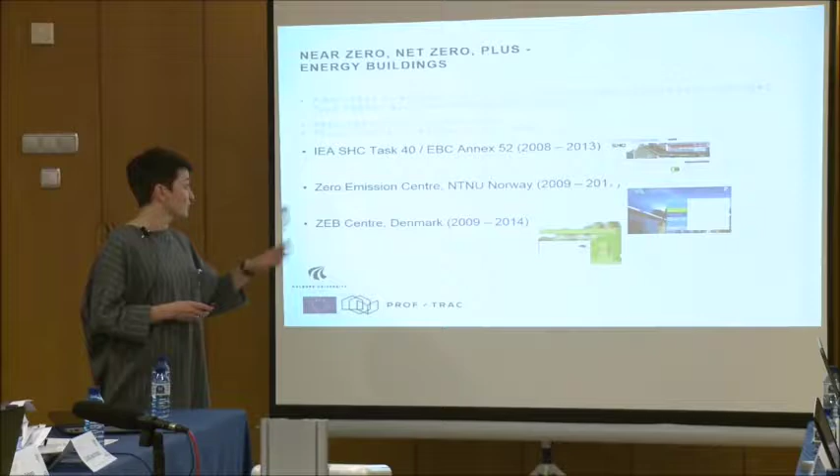Is this a building that produces energy, or a building that doesn't use any energy? Is it a building producing energy on-site, or can we produce it by a windmill placed somewhere far away in the fields? Many of those questions were asked within this Annex 52, and one of the outcomes of this work was to make a definition of nearly zero energy buildings.

As a result of this work, we started a collaboration within the Zero Emission Center in Norway. This center started in 2009 and is still existing. It will finish now in 2017. A corresponding center for zero energy buildings in Denmark started in 2009, and it's now closed, since 2014.

The difference between those two is that in the first one, the focus was set more on the zero emission center, so we speak of the emissions of the building. And in the other one, we have been focused more on the energy.

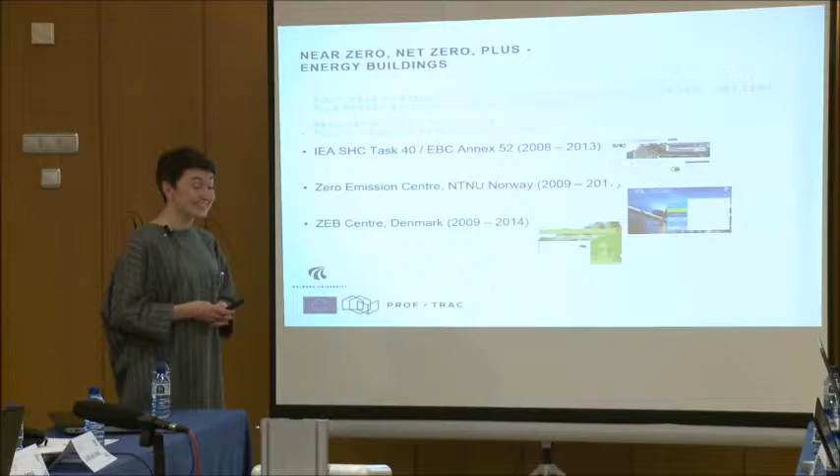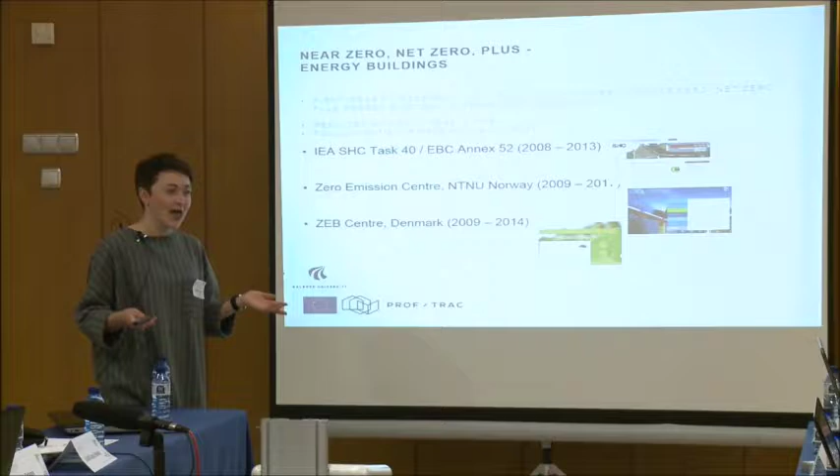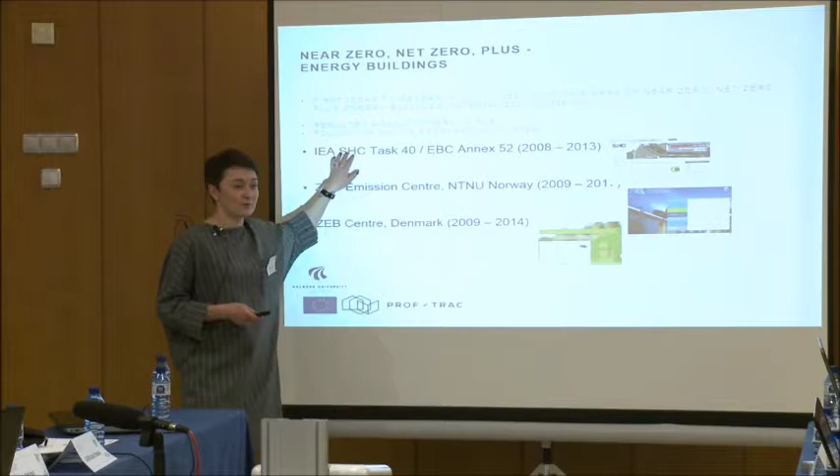In Norway, are all the buildings near zero? No, not because all the buildings are nearly zero, although this is the goal. But if you use electricity - the electricity in Norway doesn't have CO2, it's hydropower. Yes, that's true, but the question is whether a building with huge energy spending can be considered a nearly zero energy building, although you compensate for all the energy by renewable sources. This is one of the discussions held within the annex, and one conclusion was that a building with high energy spending is not a nearly zero energy building, although you can compensate for all the energy you spend.

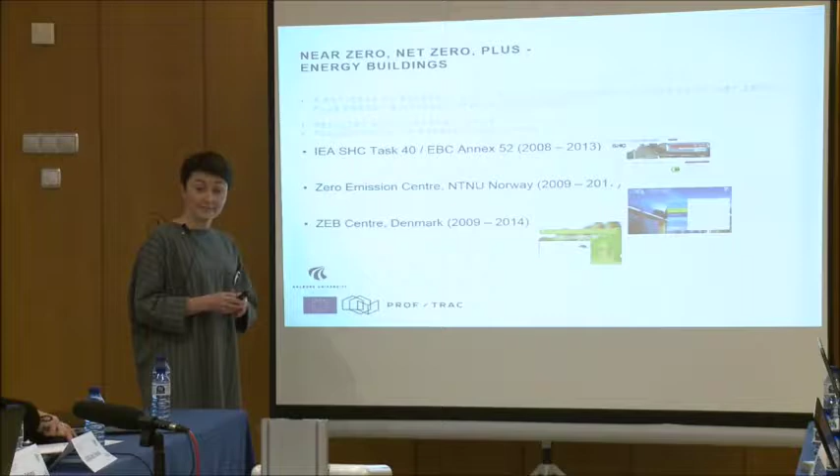So the idea is, what do we need to do if we want to get a nearly zero energy building? First of all, we would like to reduce the energy need in the building. Then, in most cases, we will have some energy spending, and those have to be compensated or produced by renewable energy sources.

And then how do we cover, how do we compensate? If our building uses, say, 10 kilowatts of electrical energy, can we compensate with heating energy? Or how do we deal with that? So actually we need to find a way to account for the energy. Do we account by the primary energy? Do we account by the electrical energy? Or what is the other way of accounting for the energy?

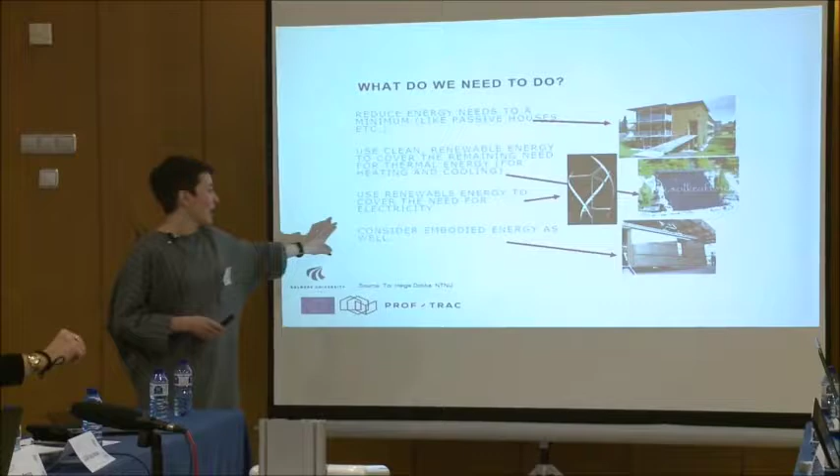And finally, we also need to consider the embodied energy in the materials of the building that we use. How do we deal with this part of the building?

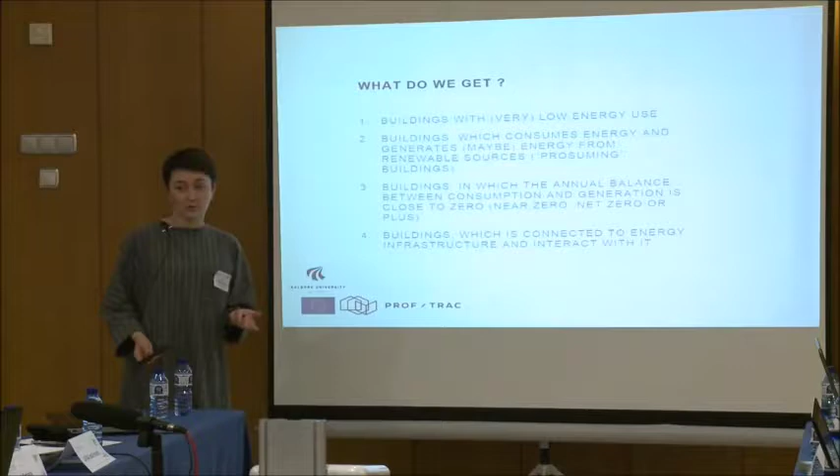So once we succeed in building these nearly zero energy buildings, what we get is a building that has rather low energy use. We have buildings that are consuming some energy, and in many cases that would also be a building that is actually producing energy - what we call the prosuming buildings.

We also get buildings where expectedly the annual energy balance goes nearly to zero. This annual energy balance is the outcome of Annex 52, that when we account for zero energy buildings, we account on a yearly basis. We could have considered accounting on a monthly or daily basis, but the conclusion was that the yearly basis was the most appropriate way of accounting for the energy.

And the final part here is that if our buildings are prosumers, producing energy, then there are two possibilities: either it's a building disconnected from the grid, or connected to the grid. If our building is connected to the grid, then it becomes a very important part of the overall energy system, and we cannot discuss a building as a standalone unit. In this case, we'll have to discuss the building as part of a larger interface.

So the challenges related to zero or nearly zero energy buildings are, of course, how do we determine the balance between energy production and energy savings? How do we deal with that? How do we design buildings that interact effectively with the energy system and the network, and that can help our energy grid?

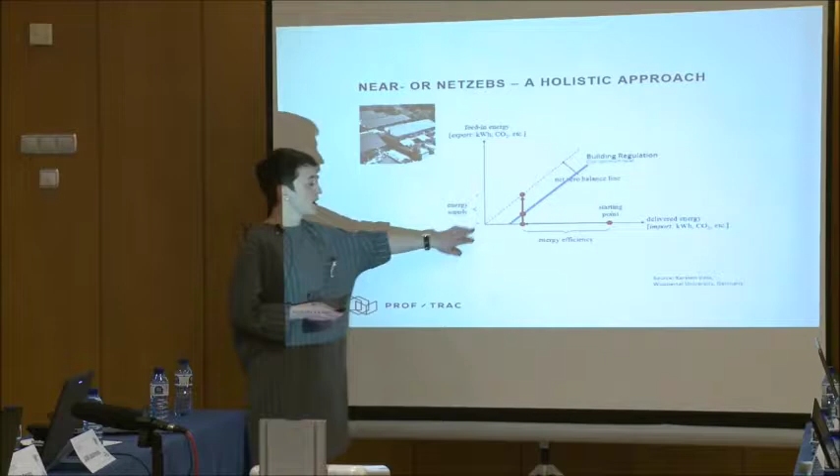This is a discussion we have had just before, where on the x-axis we can look at the delivered energy, or the energy demand of the building, and on the y-axis is actually the production of energy, or renewable energy, on the building. So in this case, if energy use in our building is rather high, that would also mean the production of energy should be correspondingly high.

If we optimize our building and reduce the energy demand, then we will actually end up with rather small energy production. And of course, we do not do this one, because it will be very difficult to compensate for the high energy demand, as it will be quite expensive. In some cases we do, of course, but that's not the optimal situation.

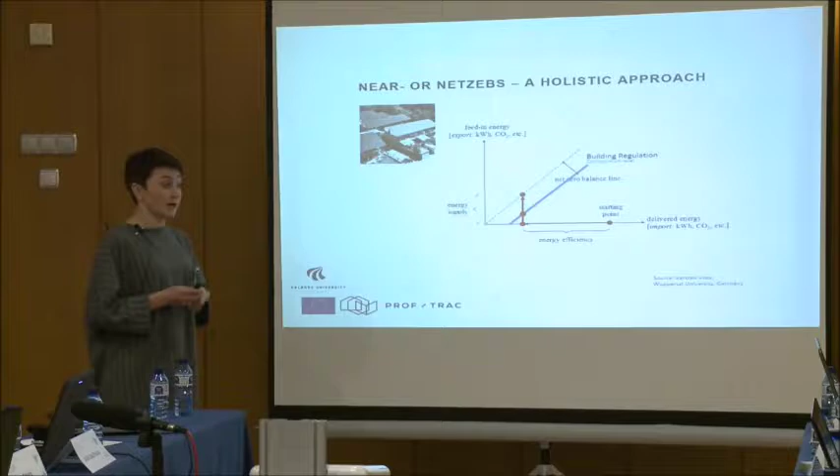Studies have shown that it makes sense to optimize the building to a certain level before we apply renewable sources. For the example of Denmark, it is set by the governmental building regulations, where a certain line is drawn up that says this will be the optimal life cycle cost, or the investment cost, for consumers to go for this level.

So we optimize to a certain level. We are not going all the way to zero, because if you go all the way to zero, it will be quite expensive. But if we stop at a certain reasonable point, then we can, with a reasonable cost, optimize our building and compensate for the energy use using renewable energy sources.

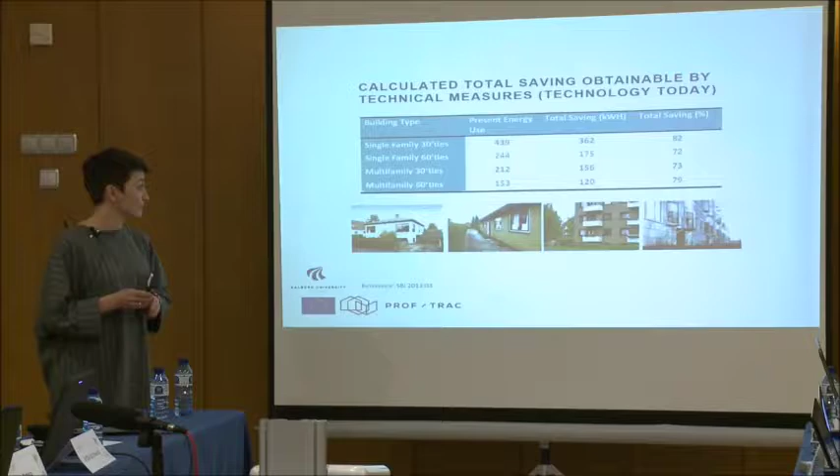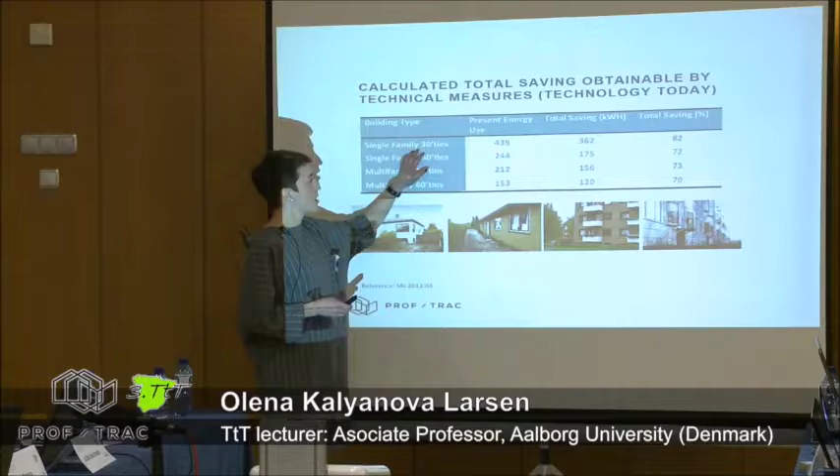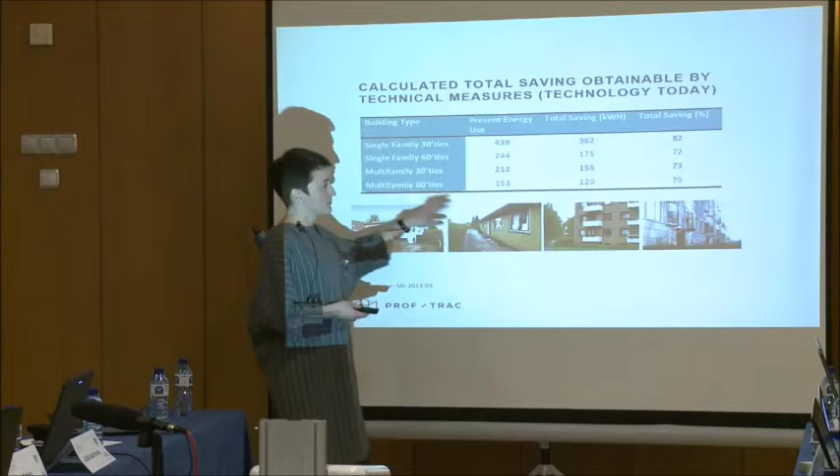Again, looking at the Danish example, we have a lot of different buildings coming from the 30s, 60s, and 80s, and some calculations have shown that if we look at single family houses from the 30s, we can expect 82% energy savings if we renovate those buildings. The value is very similar for buildings built in other years. For example, buildings from the 60s are also very poor, and they can be optimized and renovated.

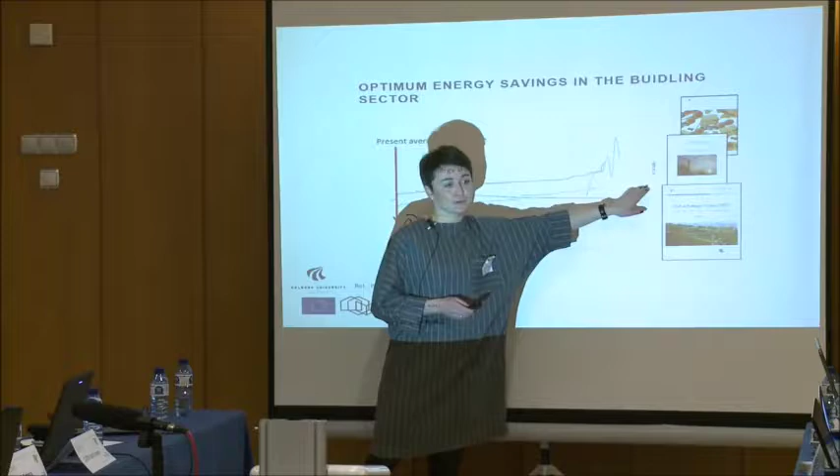For those cases, this is the orange line, we have a certain cost. If you look at new built buildings, that will be the green line. And these new buildings start with energy use at around 70 kilowatt hours per square meter. We can see that the new buildings are rather cheap to build in order to achieve this low energy use.

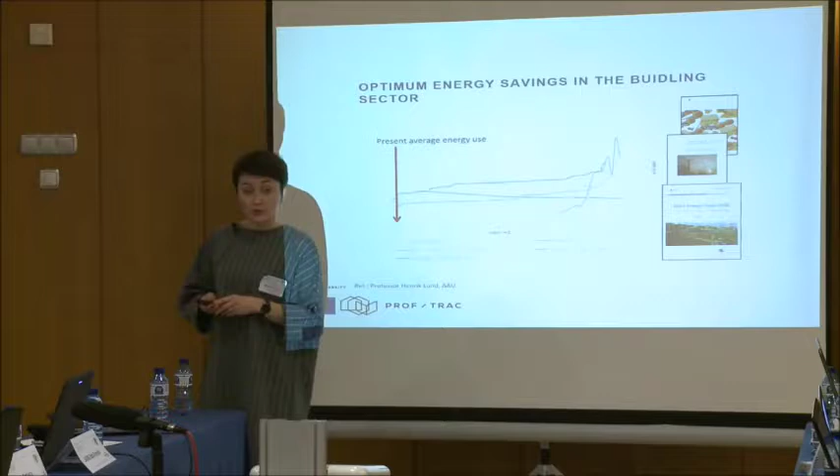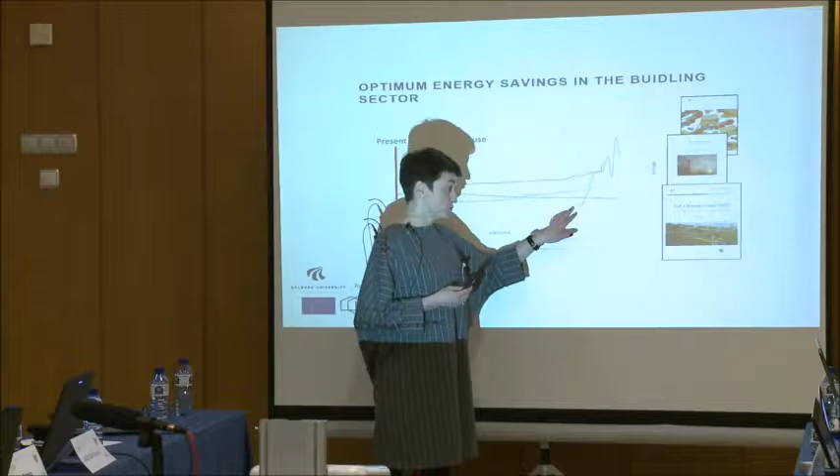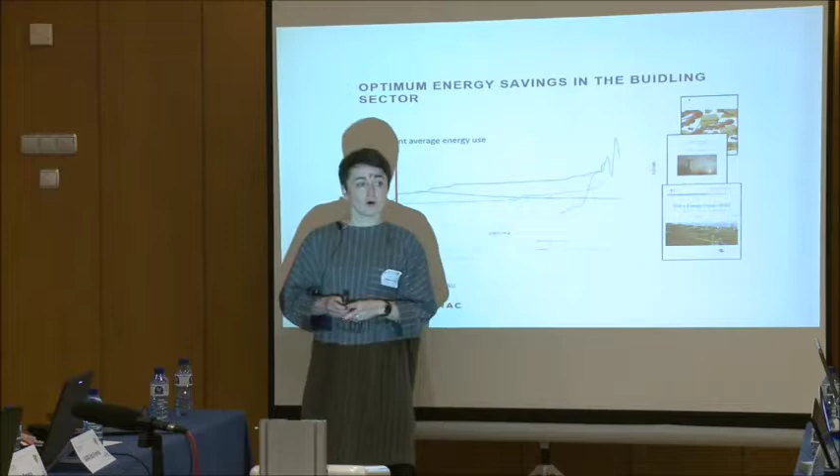But if we follow the Danish regulations, which have been sharpened, the expectations for energy use in buildings are now very, very low. So actually we have to optimize our building even further. Right now we are at around 20 kilowatt hours per square meter per year. But this doesn't come without a cost. You can see those peaks, that our buildings become very expensive to build. This is because we have to use mechanical ventilation systems with heat recovery, which has a certain investment cost.

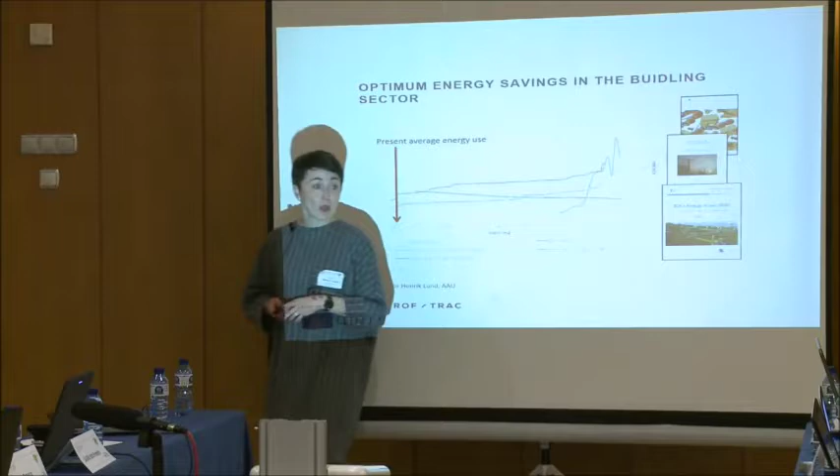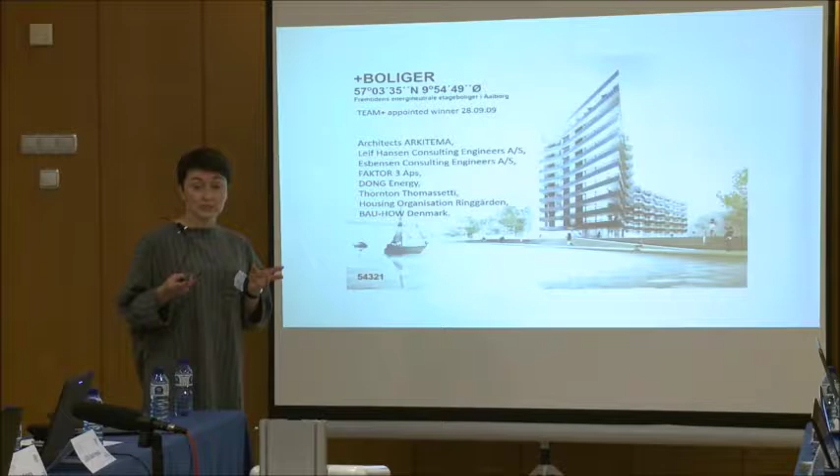This is an example of a case study - a building that had to be built in the city where I live. This was a building disconnected from the grid. Before they took the decision whether it had to be disconnected or connected to the grid, they did a study on what the life cycle cost would be, whether we take different renewable sources and make a building fully autonomous, or whether we connect it to the grid.

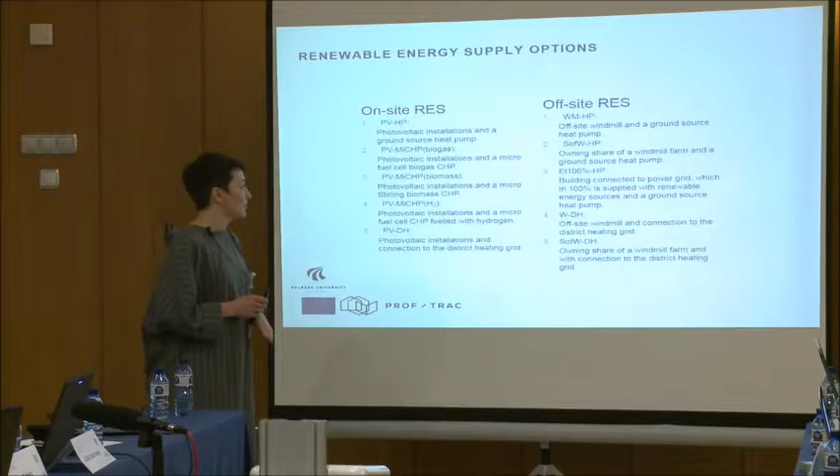Here you can see the list of the different renewable sources that have been considered. There are photovoltaics of different variations, and these are connected on the site, or produced on the site. And there are some renewable energy sources that are produced not on the site - this is off-site energy generation.

Can you explain the different technologies? Those are over here, okay. Those are, and they're also on the USB. But if you're interested in more detail, because this is not me who did this work, there is a publication reference over here. It's published, so you can have a look at it.

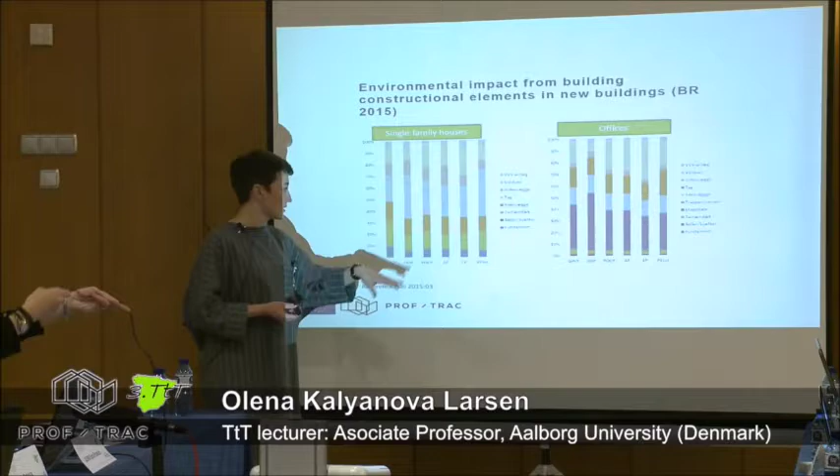So again, speaking of the environmental impact of our buildings, we can also look at the different types of buildings - we have single-family houses and we have offices. The idea is that we can look at the contribution of the different building constructions, for example HVAC systems, windows, floors, etc.

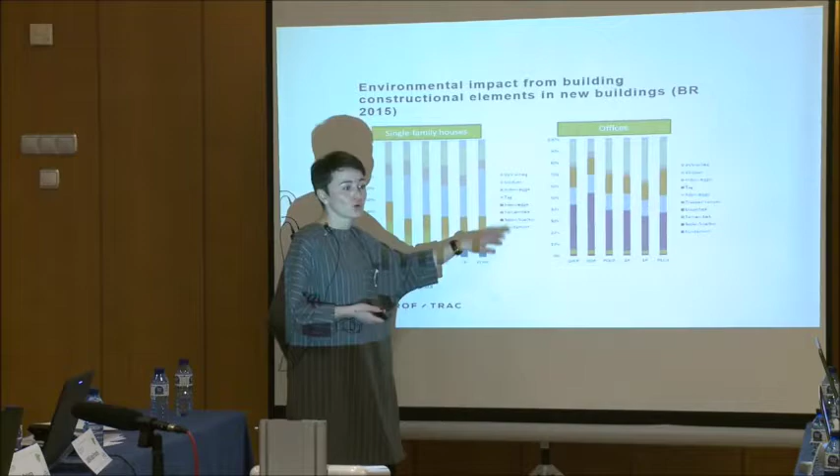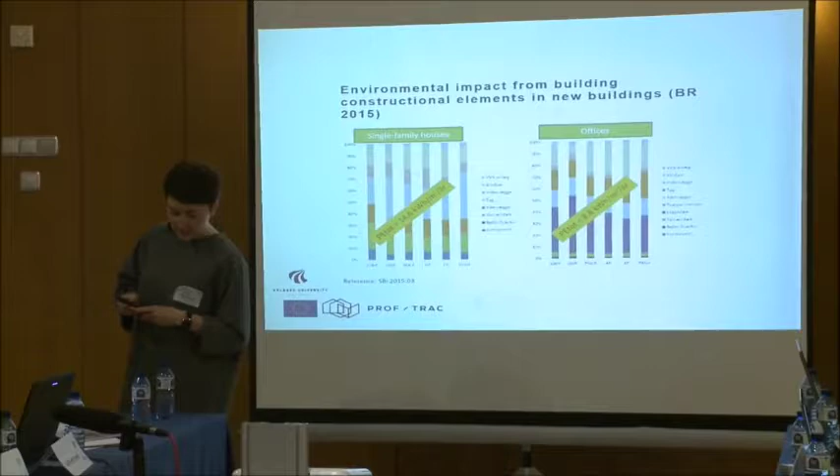Here, if we look at the primary energy in total, we have the single-family houses and we have the offices. The thing is that actually the life cycle cost in the calculations for the single family houses seems to be much higher than it is for the offices.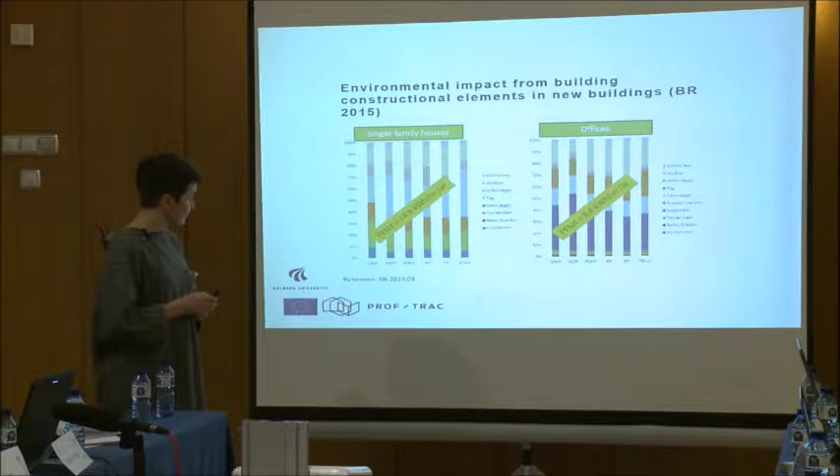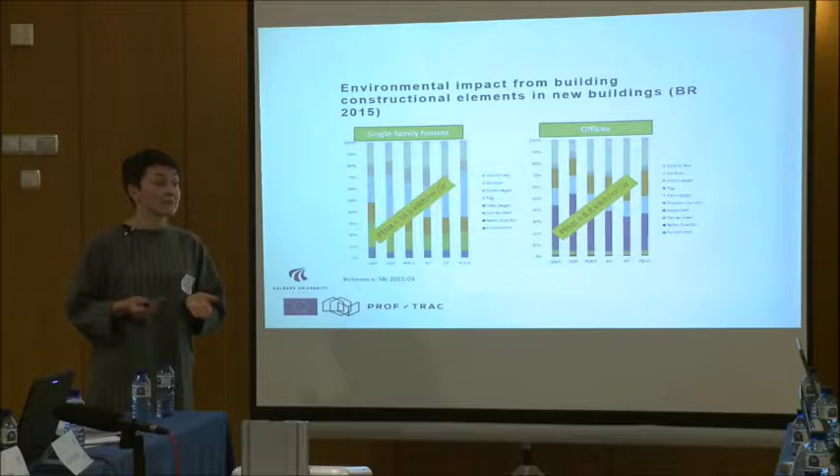And that is one of the calculations that has been made within this project. We do have to consider the life cycle cost. But as I said, the nZEB, or Zero Energy Building Center, has not been focusing in Denmark so much on the emissions. Over here is the primary energy for the life cycle cost.

Some of the other challenges that we are discussing is actually how the buildings interact with the energy systems, if they are a part of the energy system.

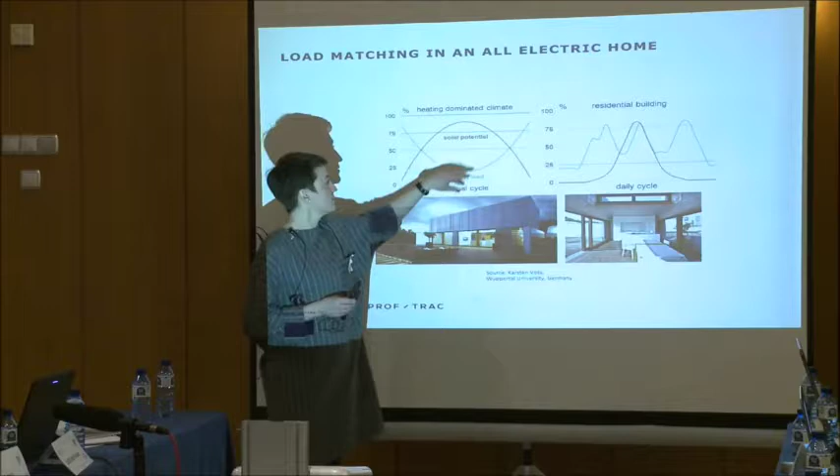Some of the calculations that have been done in a building that is fully electrical - what we normally consider is that the building's annual cycle can look in this way, that we actually can produce quite a lot of energy in the summertime using the PVs, but actually the energy load in the summertime is reducing.

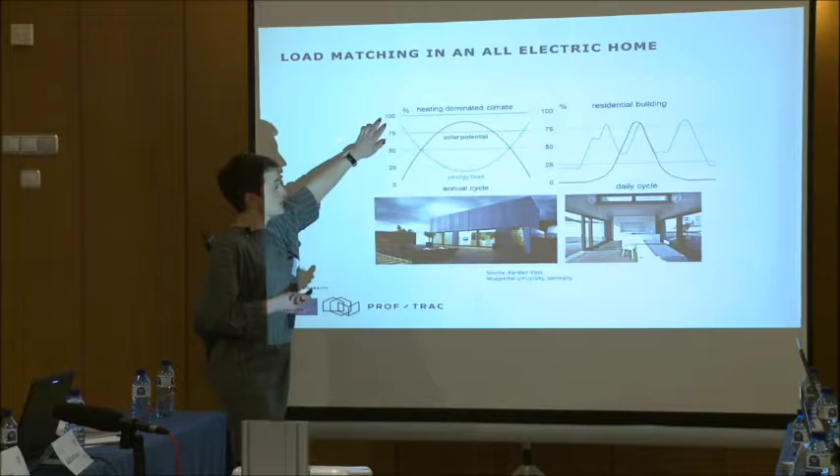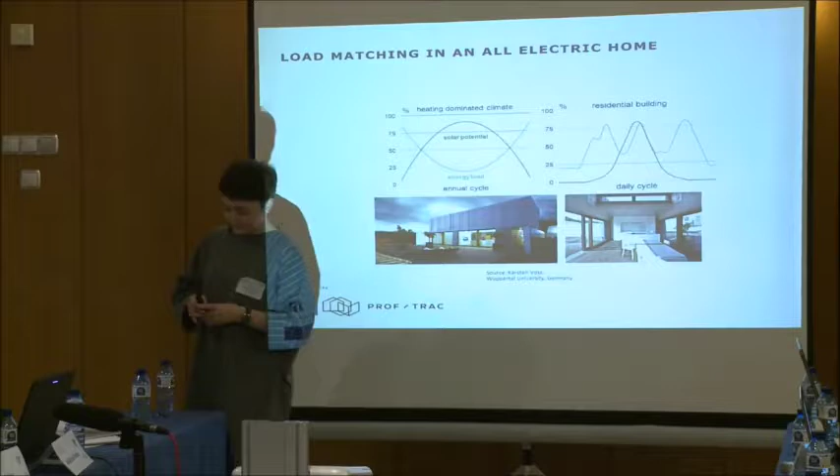But if you're looking at the photovoltaics on a daily basis, those are much better correlated to our daily cycle. Maybe not for the single family houses, but generally for the grid, the highest energy demand happens during the daytime, meanwhile at nighttime we are not consuming.

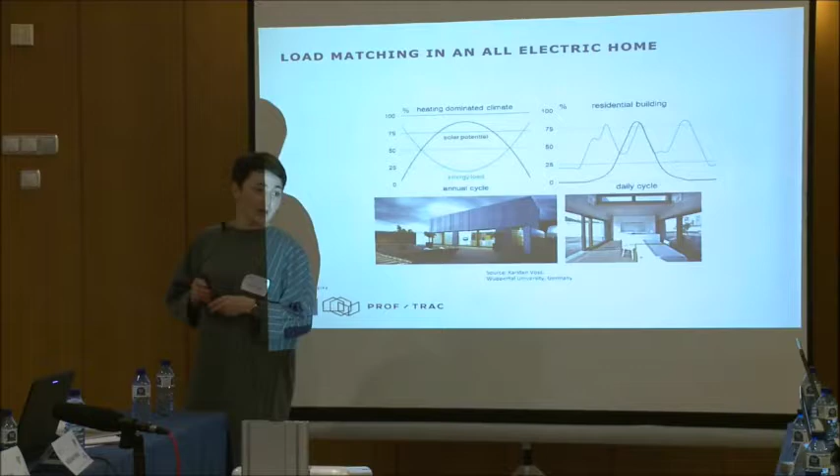Yeah, the business hours, of course. But in a certain way, if we speak of a building that is fully electric, we can compensate both for heating and cooling using electricity, if this has to be considered.

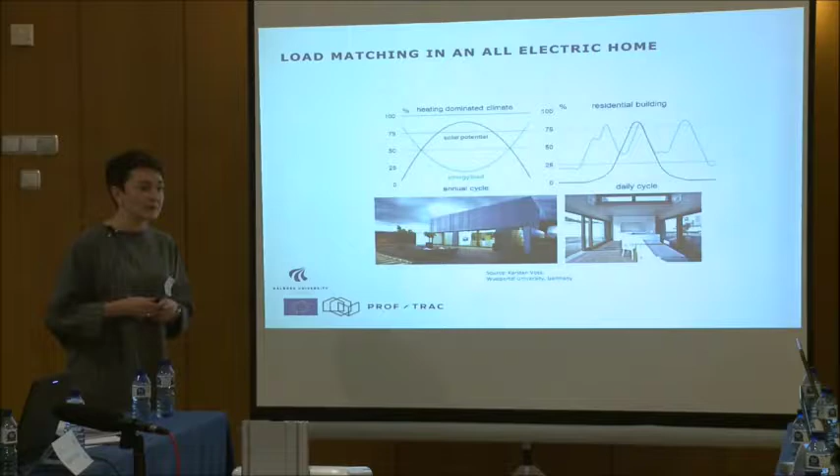This is one of the case houses which has been started by Karsten Voss from Germany, but I think this is an illustration that can apply to many places. And this is the case that I can speak more about.

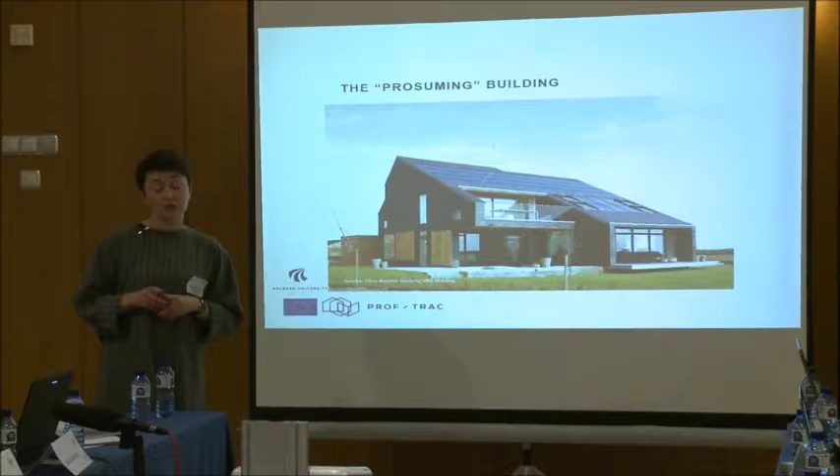Yes, but this is the building - I don't know if you have seen it before - it's called Home for Life, or in Denmark it's called Active House. The Active House is, but it's in a way a research project which is a collaboration between the industry and the universities.

And this building was built some years ago, and the idea with this building is that it has a lot of glazing area, of course. It has a lot of control systems involved, so the occupants, when they live in this building, they don't have to control a lot of things.

So the shading is activated according to the indoor air temperature and according to the daylight level inside. It is highly controlled, and some people who have been there think it can be too much, because you can feel how the internal shading moves, external shading moves. But this building has been measured in many ways.

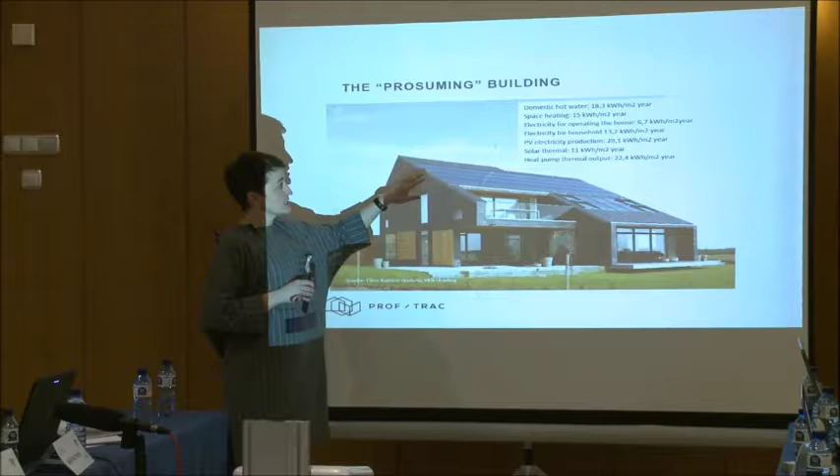So the calculation for this building has been made, and we have a certain demand for the domestic hot water and a demand for space heating. There is electricity for the operation of the house, including household electricity, which we account for. There is production of electricity by the PVs, there is a solar thermal collector installed, and there is also the heat pump.

So once the measurements have been done, we have the solar thermal collector, the photovoltaic system, and the ground source heat pump. The building is connected to the grid, and actually two thirds of the energy has been exchanged with the grid. These are the results of the measurements.

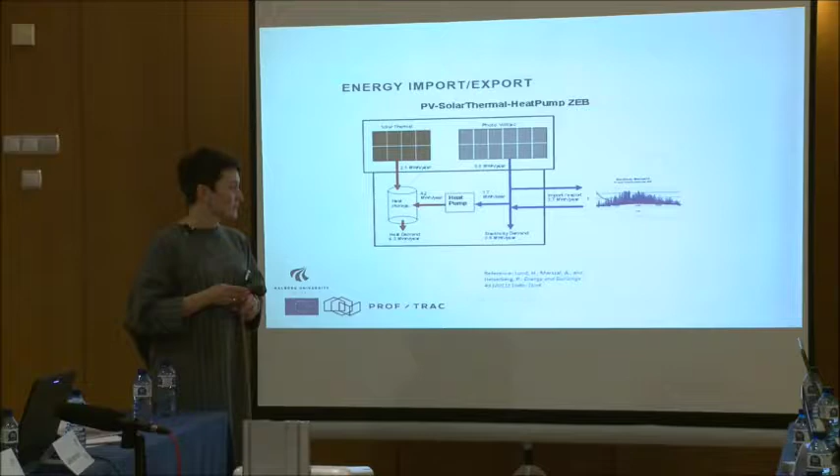Some of the discussion has also been about wind generation, because when we generate electricity using wind turbines, we have very high fluctuations in electricity generation. Meanwhile, with solar collectors, we actually produce energy during business hours, where it is also most requested, at least for the Danish network.

So one of the things that is very difficult to discuss is that we are used to looking at our buildings as a singular, standalone system, but if you connect them to the grid, they actually become an active part of our network. At least for Denmark, that's been one of the conclusions.

I'm not researching in that area particularly, but we have a good cooperation with another department that researches the energy network system in Denmark. They have been looking at the building as part of this active system, so actually we can use a building as a battery in a way. We look at the building as an emitter or a collector, using the building construction as a possibility to collect energy.

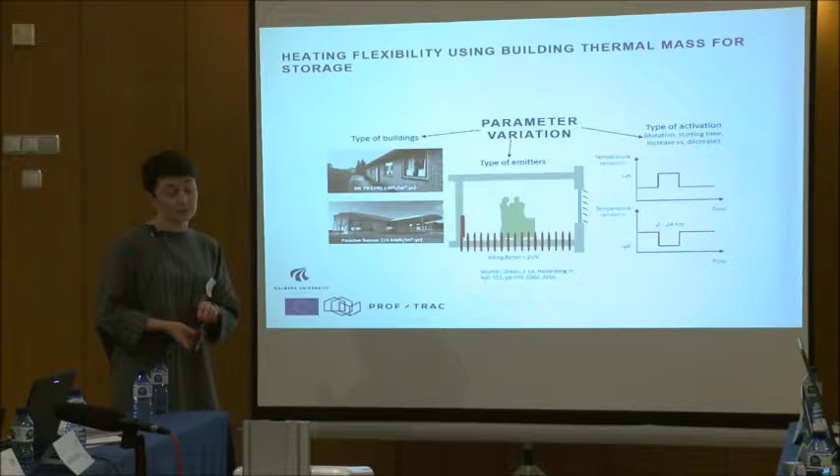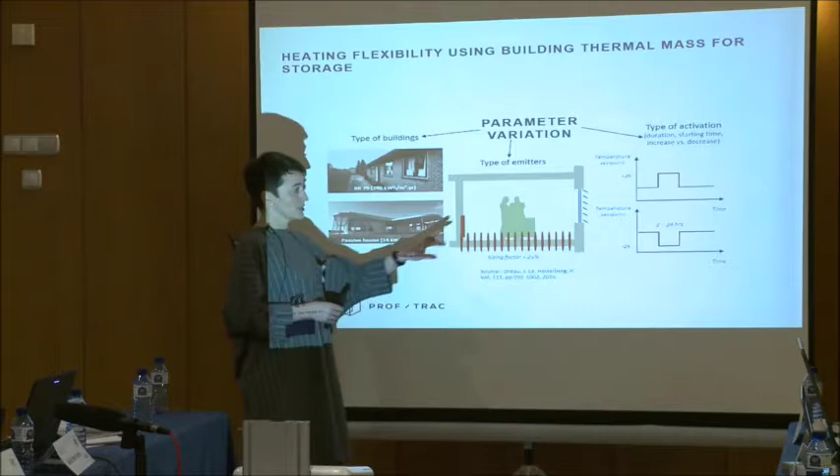This can be done by increasing the set point temperature inside the building when energy is cheap, and reducing the set point temperature when energy is expensive. When energy is cheap, it's actually a situation when we have too much energy in our network that has to be spent. So we ask our building to use energy at that moment to maintain comfort conditions. Meanwhile, when we're not using energy, we're also saving money.

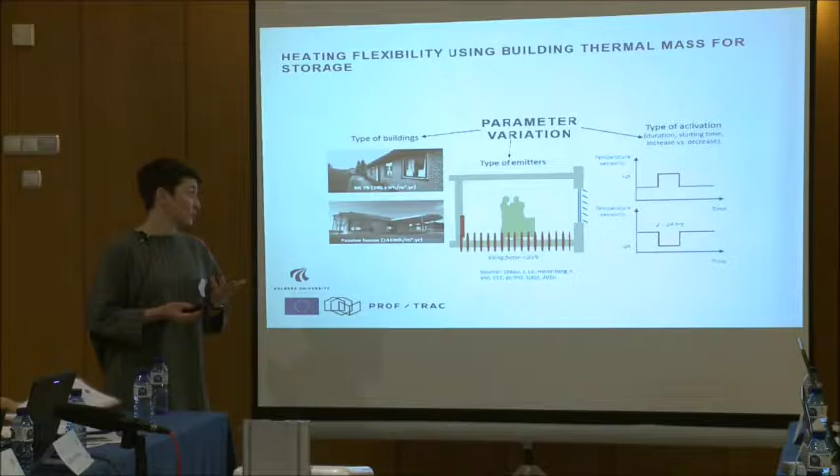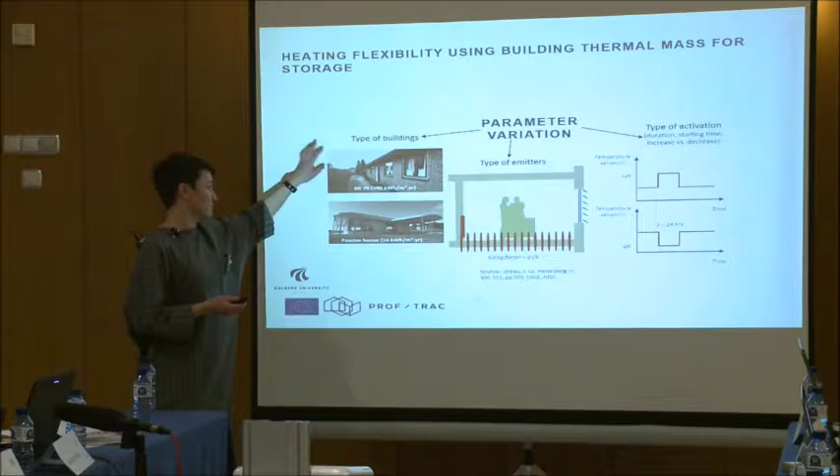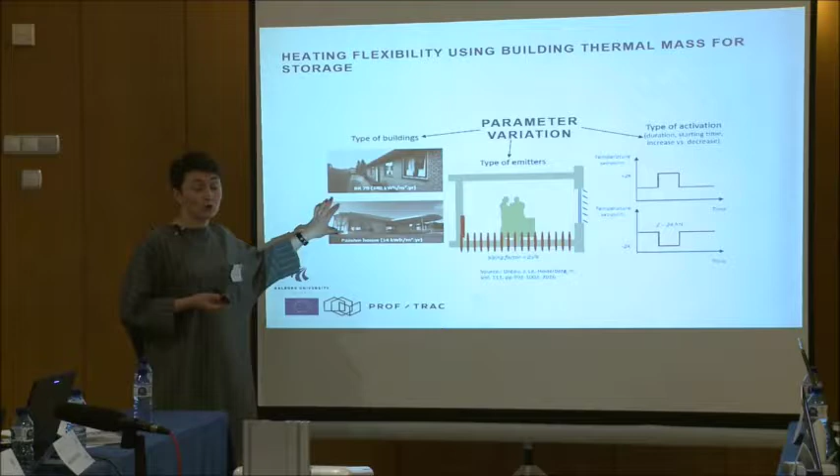These are the results of building simulations, not measurement results. We are looking at two types of buildings: one built sometime in the 70s or 80s, with a very poor building envelope and a lot of cold bridges, etc. The other building case lives up to the passive house standard, with very low heating demand and a very good building envelope.

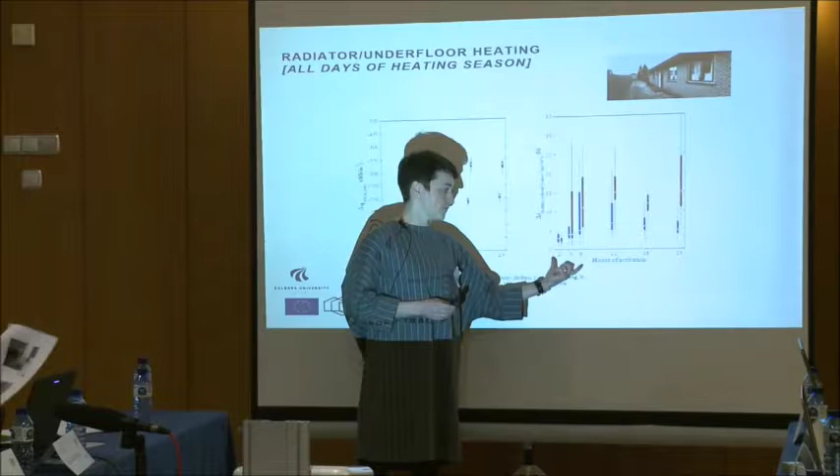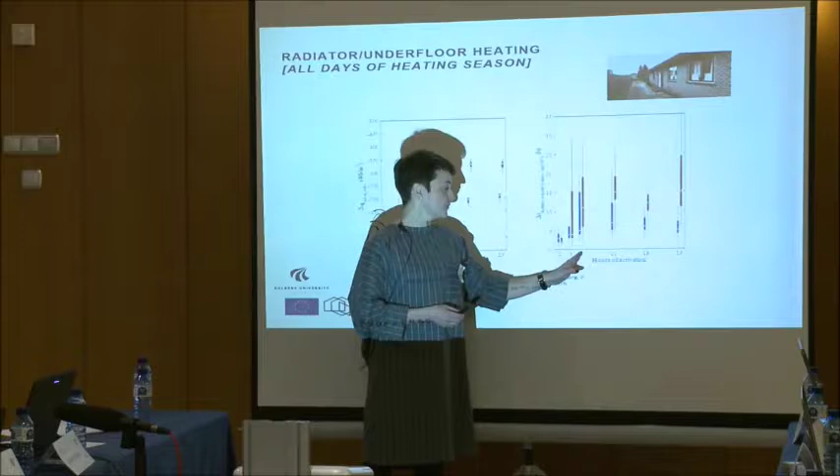These are the results of the simulations. We have red and blue lines: the blue ones are the radiators and the red lines are the floor heating. On the x-axis, if we activate our floor heating or radiator for certain hours to store energy inside the building, for this old building from the 70s, if we activate the thermal mass for around 6 hours, we can see that the heating system can be switched off for a maximum of 5 hours.

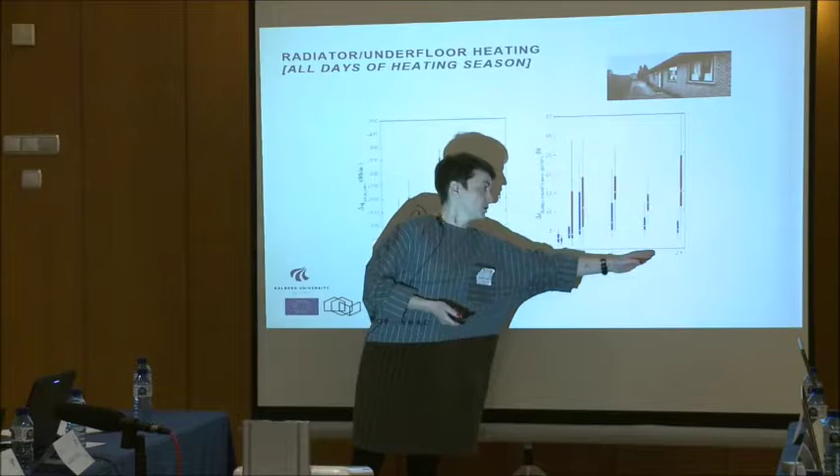So actually we do not get much out of it. If we activate the thermal mass of our building for a longer time, the performance, meaning the time we can switch off our system, doesn't get much longer.

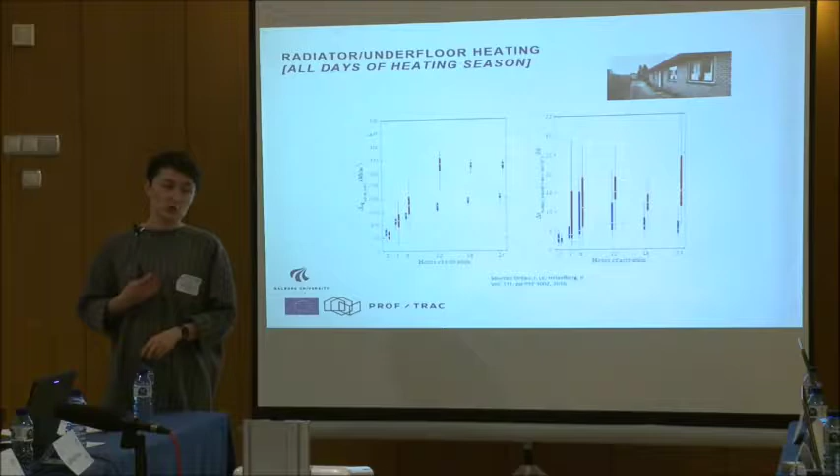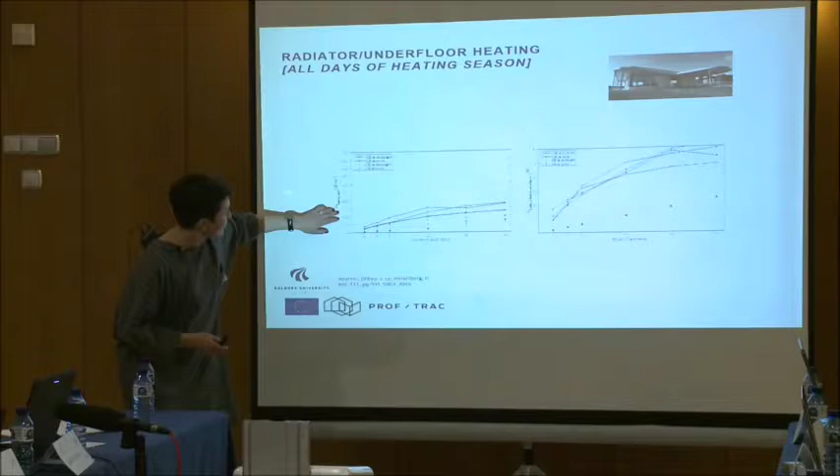This is the result of the simulations for the well insulated building according to the passive house standard. Over here we have, as far as I remember, around 100 to 200 watts per square meter that can be stored in our building.

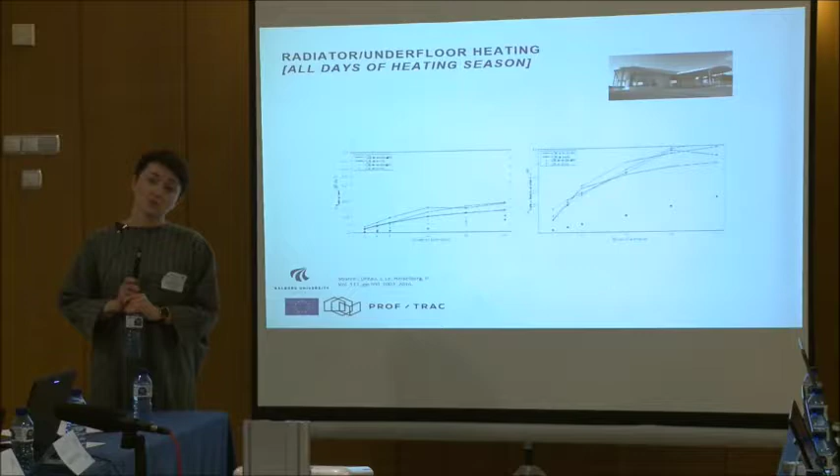Although the building can store very little, the time that it has been storing the energy can go up to 24 hours. So, well-insulated buildings are much more autonomous, and by this means they could be used in a better way as an energy storage.

If you look at the different scenarios for how we can use our energy system, we can look at different solutions. What if we switch off our heating for 4 hours? What if we switch off our heating system for 6 hours? There could be defined some flexibility factors. But since it's very difficult for you to see the previous graphs, I'm not going to describe it any further because it doesn't really make sense. So I'll just drop over those.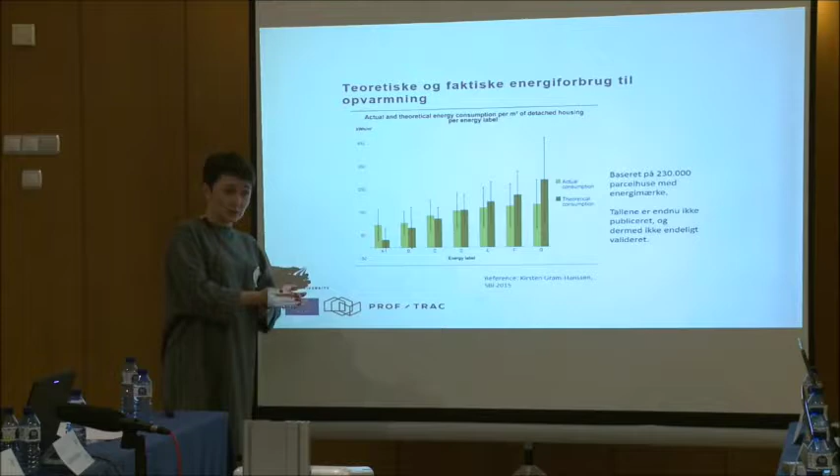The positive side of this chart is that it's based on a huge amount of data - 230,000 buildings. On the negative side, the data is achieved from the energy labeling, meaning it's not very detailed, so there could be deviation. But actually the issue of actual performance compared to the calculated one is very well illustrated here.

The one over here is the 2020 label. If you compare with the passive house standard, it's a little bit different - there are different requirements. In Denmark, by 2020, the maximum energy use is 20 kilowatt hours per square meter per year for dwellings, appliances not included, and also for offices, but for offices the lighting is included.

The reason appliances in Denmark are not included is simply because this is legislation, and the government does not believe they can require people to have a certain type of fridge or washing machine, etc. But in a way it illustrates the problem that we do not know much about our buildings.

In the building regulations we do require the energy, we only advise what indoor environment we want to have - save some money as well. And the people living in the well-insulated buildings, they're not taking care of it. Yes, but they're there, and then we can continue from here.

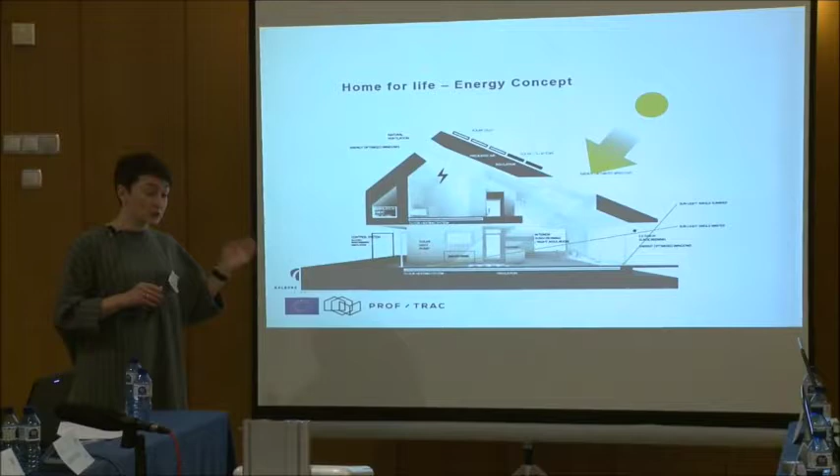So this is the building that you have just seen before. This is the building that has been standing empty for 2 years, and they were controlling and measuring how it's operating without interference of users. Then the family moved in, and the family lived in this house also for 2 years. So actually, its performance has been documented for 4 years in total. Now the building is sold and it is not being measured.

But the outcomes of this study were that the energy used for heating was higher than expected for the building. The electricity used for the heat pump was also higher than expected. And the electricity used for the control system in the building was also higher than expected - this is actually the expense that's very often forgotten, because those systems require quite a lot.

On the other hand, in Denmark, we do include the domestic hot water in the energy requirements, and here the use of domestic hot water was much smaller. This has something to do with our assumptions and our knowledge with regards to domestic hot water use - we don't know much about it.

This is a building for a normal single family, with 2 children and 2 adults, and this is what it was accounted for. The electricity used for appliances and plug loads was also lower than expected, and I will say the expectations were set very low, so actually this family didn't use much in general. Only the production of the thermal system was as expected, as well as the PVs - those are the systems we could count on.

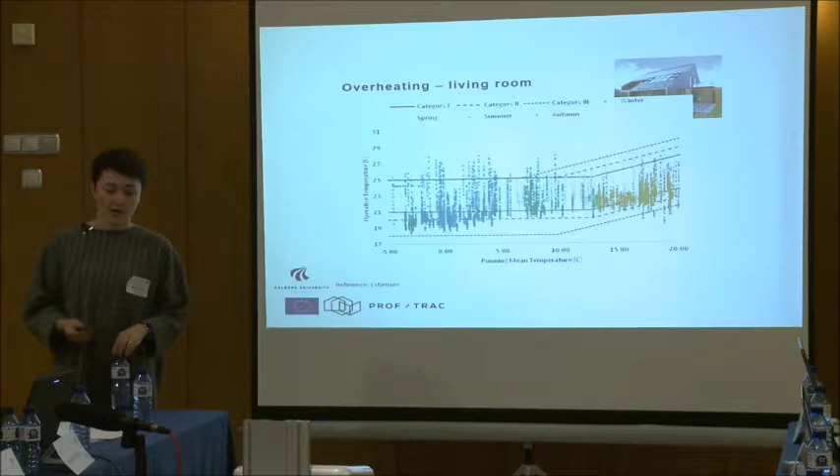So if you look at those results, user behavior was impacting the energy use of the building by 62%. And this is a thing that we have to think about, because we can continue improving our building performance, but occupants have quite a lot to say.

These are the measurements of the operative temperature in the building within a year. And on the x-axis is the outdoor temperature. What you can see here is that while the outdoor temperature was reasonably low, we had the variation within the comfort level. For some cases, the temperature in the room was lower. With the high outdoor temperature, the temperature inside of the building was increasing.

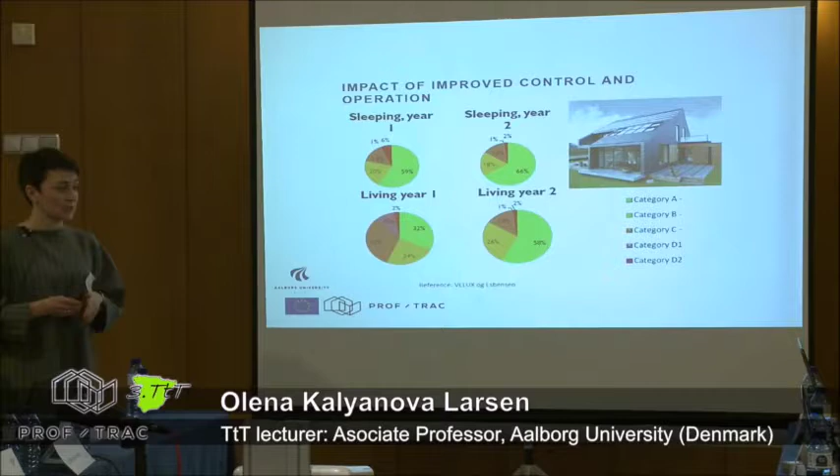And if we plot those results in those pie charts, you can see that for the first year, the comfortable environment of the building was experienced for 59% and 20%. For the next year, once we have learned more about the building performance, the indoor thermal comfort was improved. So those, with the green and orange, are the good performance of the building.

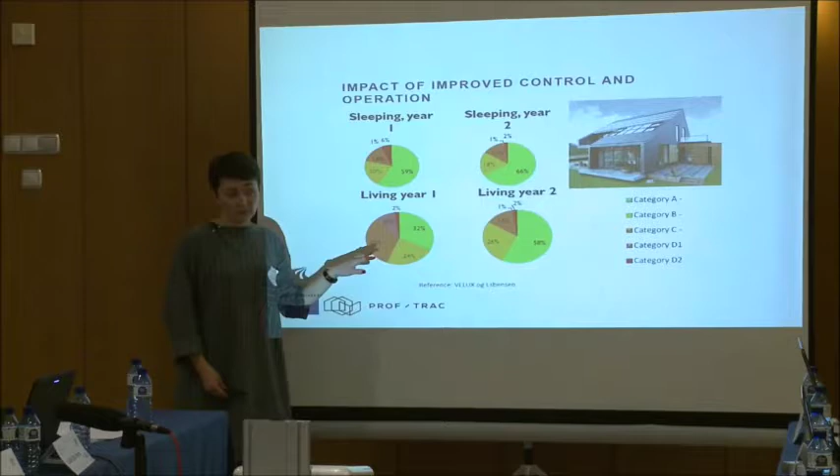The year 1 and year 2 are with the family living in. And you can see once the people moved in, the indoor thermal environment had been reduced significantly. So the comfort period was much shorter. Once they have learned how to live in the building and deal with all of the systems, in year number 2 the comfort level of the building has been significantly improved. And these are improvements by the occupants learning how to live in this type of building.

I must say for myself, I'm also living in a similar building, the same as my neighbors. And all of them complained quite a lot for the first year because it's been very, very hot in their homes. After some time, they have learned how to deal with their homes, and now there are no complaints. It's all very well. So we are learning.

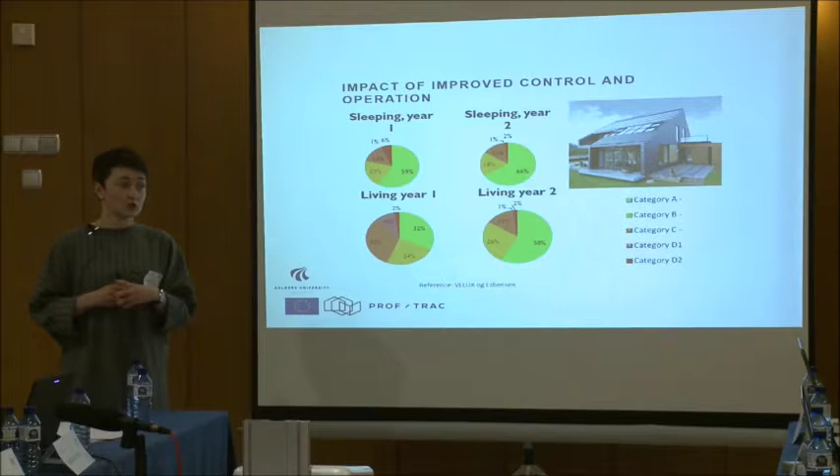So this is something for consideration, that maybe it's not so easy for us to reach our goals by only improving the building envelope, or let's say building insulation and the air tightness of the building, but we have to deal with the occupants. To a larger extent, it was because the woman who lived here this year was on maternity leave. And you can see there are quite a lot of windows and no trees around, so anyone passing by could see her breastfeeding. So she had to shut the windows with curtains for longer periods. So that was one of the issues here.

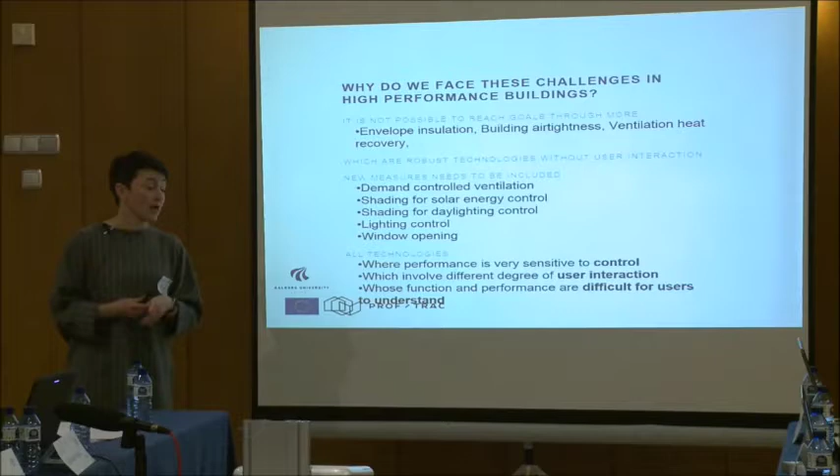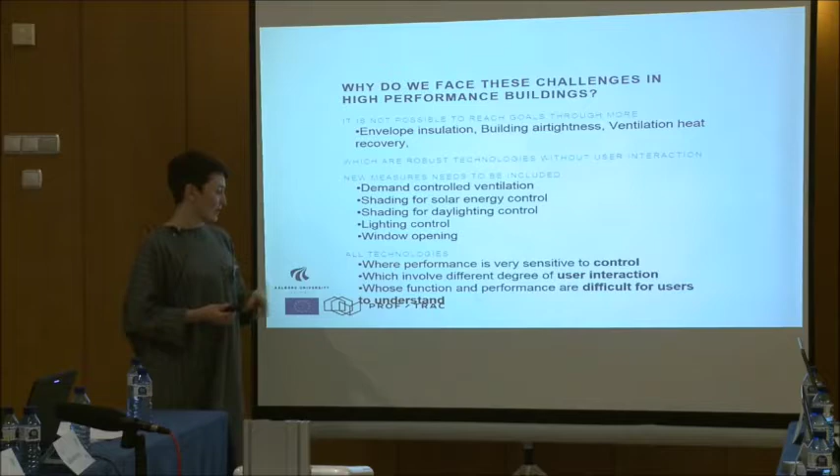So the thing to say here is that besides having those very steady systems in our buildings, we actually have to work with the systems that are controlled. That's demand control ventilation, shading control, lighting control, etc. And having those controls is a sensitive matter, because they are not so steady and they influence building performance quite a lot. And this is what we have not been working on as much. This building is an example where it has been demonstrated that it is very sensitive to the control, and the user interaction had quite a lot to say for the final energy and comfort performance.

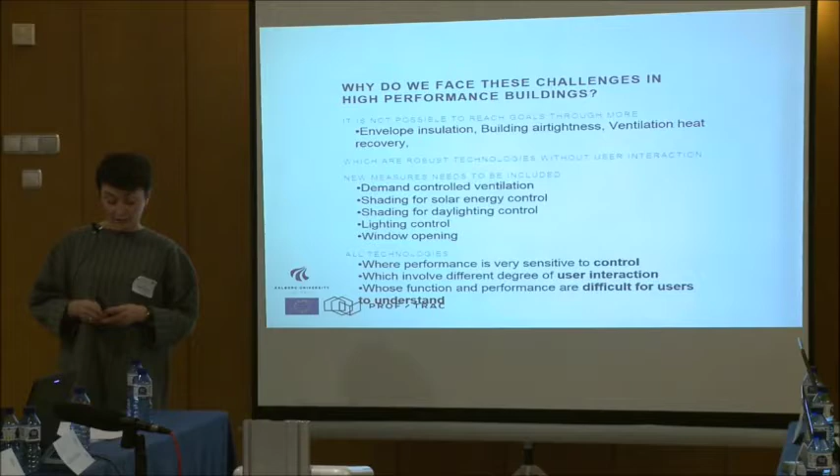Yes, and I'm not going to spend a lot of time on the reflections. I think those are more or less the headlines of what we have been talking about. And those are available on the USB disk, so I can keep the time and stop here.